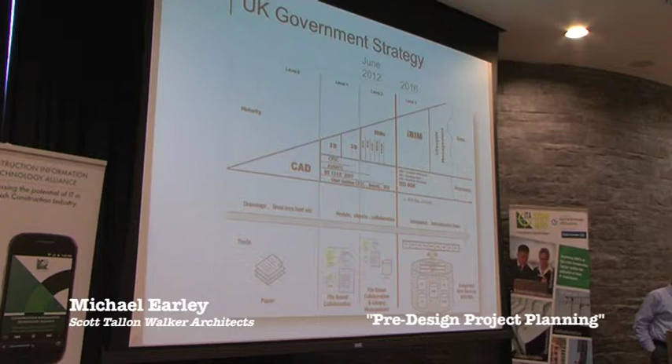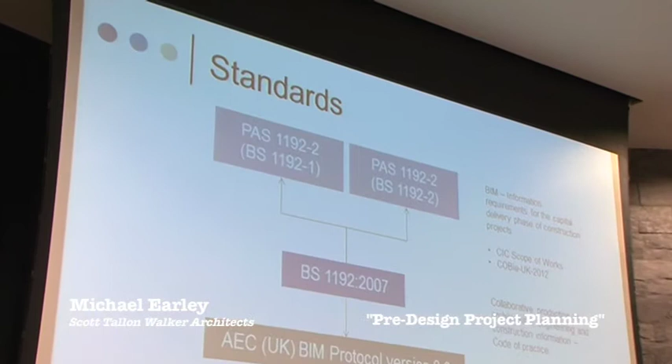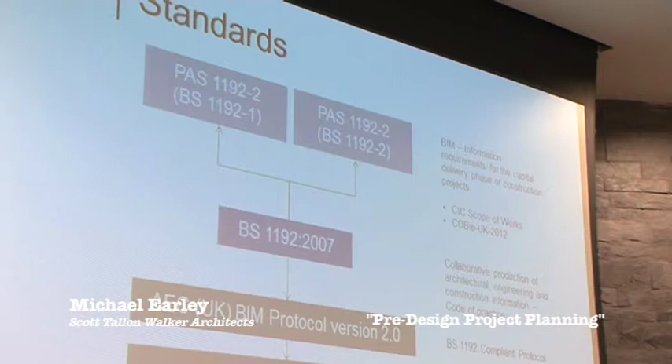Okay, I'm going to go back to where the standards came from, so I can give you some idea of how we came up with the RIAI template BIM Execution Plan. It's still in a draft format, but the essence of it starts off from BS 1192:2007. That was a British standard, set up basically for collaborative production of architectural, engineering and construction information, and it's a code of practice.

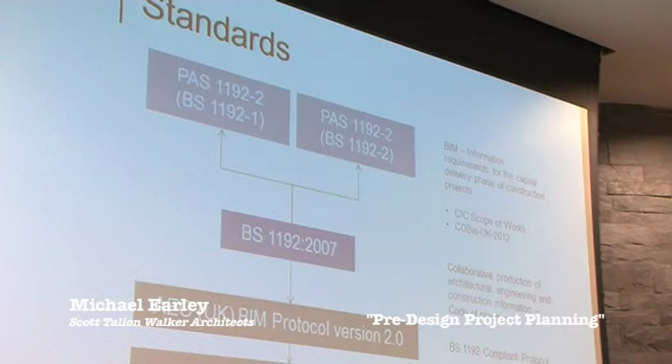It doesn't necessarily have to do with BIM, it's to do with basically how to name files in construction, how to share them, and one of the important aspects of it is the way that it shares them. And this has been used now in sharing models. There's 4 stages: there's work in progress, shared, published, and archive. And it gives a very clear definition of how fit for purpose a BIM model is.

There's 2 documents being worked on at the moment. I only have access to one, which is the PAS 1192. PAS stands for Publicly Available Specification. Ultimately, that will become BS 1192, probably this year, I would suspect, and there'll be another one then, which is another version. The first one's to do with basically delivery of projects, and the second one will be to do with sort of operations and maintenance and portfolio and asset management. So very much for the UK government basically to look at maintaining the assets that they have.

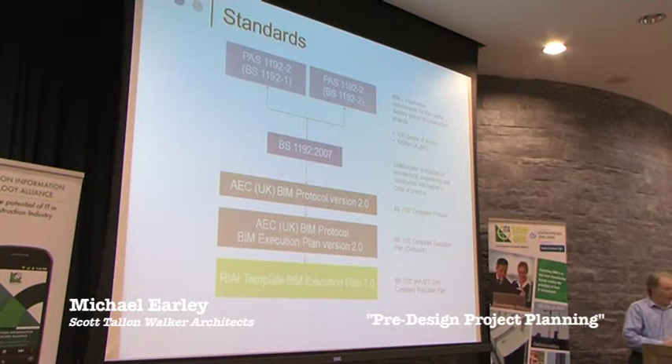Also, what came out of BS 1192 was the AEC UK BIM Protocol, version 2. Version 2 was brought out in September, and they also brought out a BIM Execution Plan. It's not so much a BIM Execution Plan, it's kind of a guidance on how to write a BIM Execution Plan. But it's actually very good. We used it then as the actual template to generate the RIAI template BIM Execution Plan, and we gave it a little bit of an Irish flavour.

When we started off, I suppose I thought, would we produce the BIM protocol itself again? The BIM protocol is quite a beefy document. It uses BS 1192 as the basis, but says exactly how you do it, as if you were doing the project in-house, where you put your files, how to name them. It's actually excellent guidance.

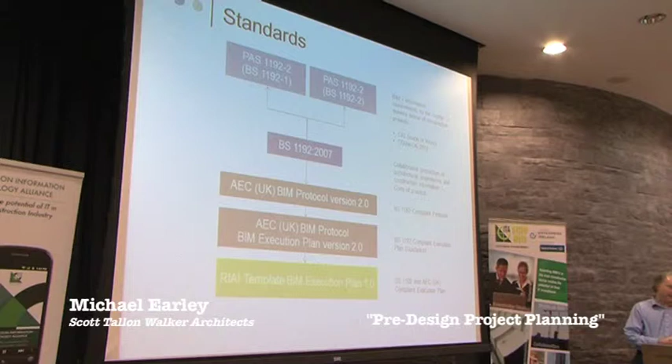The execution plan, just to make it clear, the execution plan itself is how the team works together. So it is, I suppose, the lowest common denominator of how the actual project team, when I say the project team, I'm talking about the structural engineers, mechanical engineers, it could be planners, architects, everyone basically who is involved in it. And it sets out basically the lowest common denominator for everyone. And it's a document, certainly at design stage, that would be agreed between everyone, that's the minimum standard that you'd work to.

Okay, so BS 1192, just a quick slide on that as to what it is, just in case people aren't familiar with it. It defines the common data environment. That's how you share model files. So how fit models are for purpose, naming of containers, which are basically folders and files, the suitability of models, drawings and documents, covers revision control. It also covers spatial coordination.

In our BIM Execution Plan, we've gone a little bit further on the spatial coordination and used the Ordnance Survey Ireland coordinate system, which is the ITM coordinate system, and gave a little bit more detail on that to make it more local to ourselves. And it covers quality management as well. It's a very good document, and certainly if you're doing a BIM project, it would certainly be there as one of your standards to recommend.

PAS 1192, which will become BS 1192, Section 2 and 3. Section 2 is to do with the information delivery cycle. As I said earlier, one of the things that the UK government, I know I keep going back to the UK, but they are ahead of us, and we have a bit of catching up to do. But Part 2 is to do with the information delivery cycle, and basically what the UK government want to get is this 20% reduction, not just through the use of BIM, but through improving the processes as well in the system,

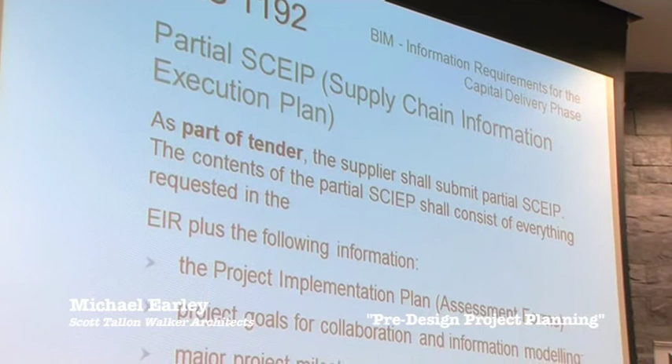The partial SCEIP, as I said, that'll be part of the tender. So each supplier, whether it's someone supplying architectural or engineering, or it could be supplying counters or whatever to the project, will need to produce an SCEIP, a partial one initially as part of the tender. And there's certain specific information on that. Basically, it's got to include all the requirements of the EIR, the Employer's Information Requirements document, and also some other information in addition to that.

Post-contract, then, you'll have to produce the final SCEIP. And the final SCEIP, as I said, is looking for a lot of information, but if we can standardise our response to that in this document, an execution plan, where the majority of the work will be done, it'll be a huge resource, I think, to everyone.

So there's a whole list of information. I won't go through it at the moment, but you can see things like drawing sheet templates, layer naming conventions if they're going to be used, what file naming you're going to use on the project, how information is going to be approved. It's going to be quite detailed. Exchange formats, project collaboration, EDMS, where you're going to store the documents, and then you'll also have the master information delivery plan as well, and any agreed construction tolerances for all disciplines. So they're going to be looking for a lot of information.

Okay, just a quick overview on the roles, because what they're doing is standardising roles and also documents. The employer's representative is probably a reasonably familiar sort of role at the moment. That is the person, it could be the actual client, or it could be someone that the client assigns as an expert, to make sure that the work is done in accordance with their requirements. There'll be a technical advisor to them, they've identified that.

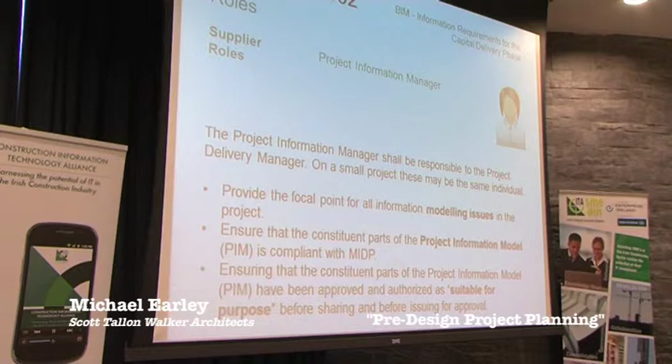There's a project information manager. This is akin to what I'll show you shortly as the BIM Coordinator. This is the person who's the expert on BIM, and their focal point is information modelling issues, managing the BIM model.

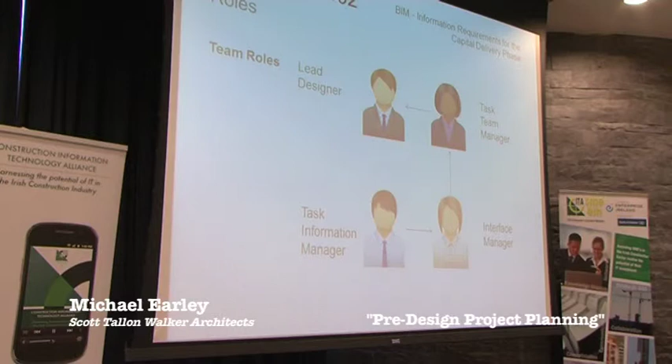There are a few other roles: lead designers, task team managers, and so on. You can look through the PAS document and see their roles and responsibilities. On a very large project these could all be individuals, but they could also be the same person.

The lead designer is the person responsible for design. One thing not to get confused about is the lead designer is responsible for coordinated delivery of all design information, whereas the BIM coordinator or project information manager is dealing with BIM alone, making sure information gets delivered on time and in the right format. There are all these other team roles you can have a look at on the slide.

The Master Information Delivery Plan is kind of an overall document. This includes BIM, includes information about the milestones for the project, it includes everything. It's basically like a master plan for the project, and it needs to be maintained by someone on the supply side, design team, or construction team.

The project information model is what they refer to as the actual BIM model, or a PIM document. Some of these terms may be subject to change since the document is a draft, but they call the BIM model the project information model. It should be progressively developed and delivered to the employer, so they're clearly looking for the BIM model through a series of information exchanges. It'll be developed in accordance with the Master Information Delivery Plan, and consist of graphical data and non-graphical data documents.

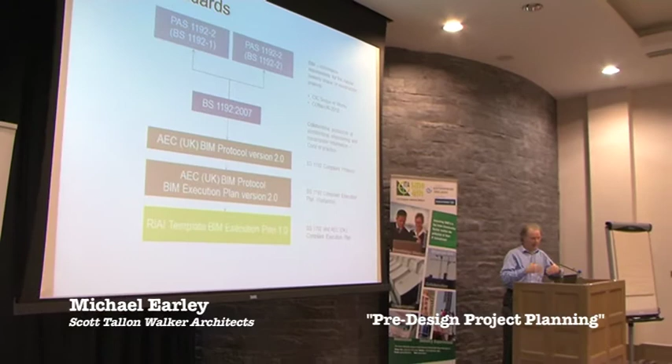We thought it's so good that we could use it nearly as it is and extend it to make our own template BIM execution plan. The one thing I was concerned about was there's a lot of good guidance, but when you sit down to a meeting managing a BIM project, you need something you can say, look, here's how we're going to do the project, not just that this is good guidance and you should do it this way. You need something that says this is exactly how we'll do it, and can we all agree that we'll do it that way?

Be very explicit about the things you're sharing. Often you don't really want to know behind the scenes how they store it on the server, or if they back it up - you just want to know you can rely on the data coming in good time. All you need to know is the name of the file, where we're going to store it, who's responsible for sending it out, how it's validated, what quality I can expect from the model, and what quality is expected when handing it over to someone else.

So very sort of practical things. Okay, so just a quick note on the AEC UK BIM protocols.

There's two main ones at the moment, the AEC UK BIM Protocol and the AEC UK BIM Protocol Project BIM Execution Plan. The BIM Protocol is a very meaty document, very good document. The execution plan is really guidance on how to write an execution plan, and that is what we based our execution plan on, that guidance.

They also have sub-documents as well. They have a version of the BIM Protocol for Autodesk Revit, for Bentley. They're going to do one for ArchiCAD and also one for Vectorworks in version 2. There is a version 1 for all those 4 systems, but they're still working on version 2 for ArchiCAD and Vectorworks. So you're getting this flavour for each platform, and it's a very good format in the sense that in the middle is the main standards, irrespective of platform, and then you get the very specifics for each platform after that.

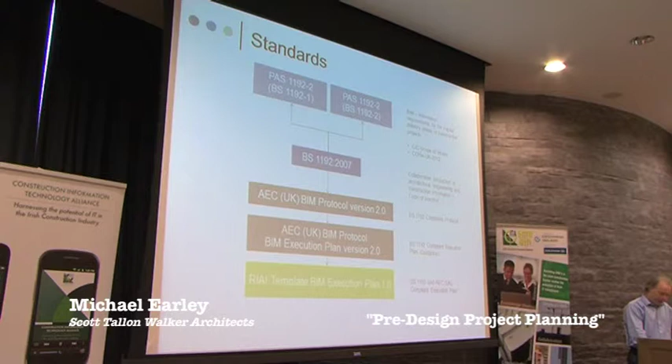So moving on to the BIM Execution Plan, which is derived from the AEC UK version. It was set up basically through a group which I'm involved in, which is the RIAI BIM Committee, and we have 6 main sections, and the section that deals with the execution plan is the good practice section. There's a little bit of interrelation between them and also between other committees in the RIAI.

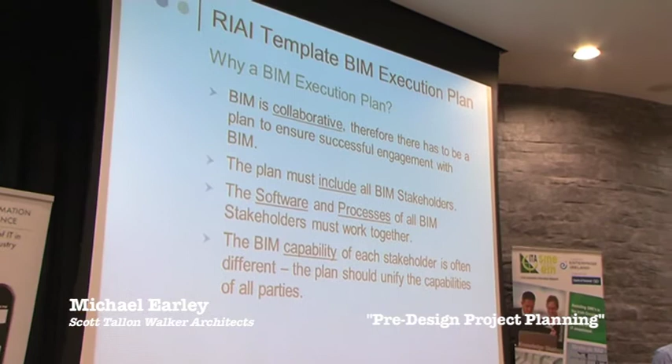So why an execution plan? BIM is collaborative, therefore there needs to be a plan to ensure successful engagement with BIM. We need to plan. In the old days, I suppose, we kind of did things because we all knew that was the way you did it, and it often didn't always work out as well as it should. In hindsight, you'd say, look, if we planned that, it would have worked out better.

But in BIM, it is complex, there's no doubt about that. But planned well, it will deliver time and cost savings.

The plan must include all BIM stakeholders. That's very important. And even though the document at the moment is the RIAI BIM Execution Plan, we knew we had to get off the blocks, and no one else was coming to the table on it. And we thought, look, the architects probably just need to get this out, we need to get something together, so that it'll drive discussion, if nothing else at least.

So the software and processes of all BIM stakeholders must work together. It's not just software, it is the process. It's very important that we're all working together, doing the same thing and reducing redundancy of effort.

So the BIM capability of each stakeholder is often different. That's going to be the case for another 2 or 3 years anyway. Every time you get a team together, there's always going to be one who's hardly used BIM at all, someone who's done 38 projects in BIM, and everyone else somewhere in between. So the plan needs to unify the capabilities of all parties.

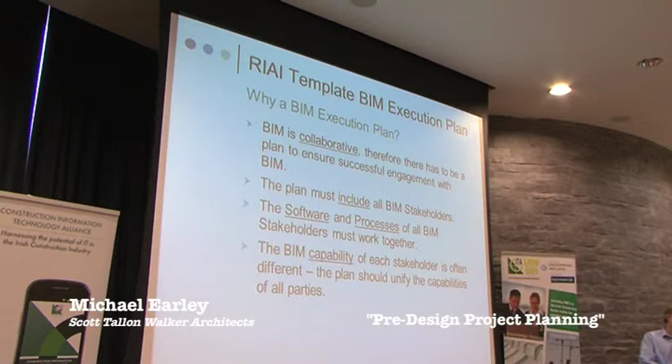So it's divided into 5 main sections. First is introduction, project information, objectives and goals, collaborative working, which is kind of the meat of the document really, and then the project resources and IT, and then there's a number of appendices which are very important.

The introduction has a few sections. It's fairly straightforward stuff. Organisation agreement is the last section, which is very important. Everyone's got to agree to the document, that they'll work to the standards in that document.

Section 2 then sets out things like the project details, the scope and so on. Unique project challenges - what's different about this project? It identifies who is the BIM coordinator, the key objectives of the stakeholders, and then it defines exactly what the BIM coordinator does and the BIM manager does in very explicit detail, what their role is. Not just that there is one, but exactly what they do.

The BIM coordinator is one per project, responsible for the BIM Execution Plan, this is a summary obviously. They will basically take, hopefully, the execution plan, the RIAI one for the moment, take it as a template and tailor it for the project. They'll be responsible for the BIM coordination program, so they're responsible for making sure that the BIM milestones match the actual project milestones.

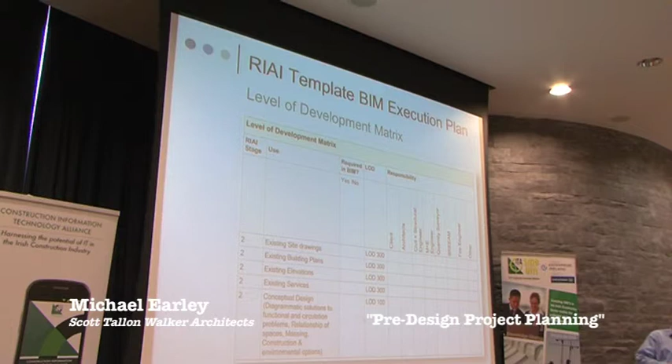Section 3 then goes through the project objectives and goals. I'm just conscious of time. The level of development matrix is an important document - it's an appendix in the actual document, and what it does is set out the level of detail in the model, because you want to make sure that you don't have door handles on the drawings when you're doing the outline schematic drawings for the building, or the 3Ds for the building. So there's got to be an agreed level of detail, and we've done our best to resolve that through 5 levels. 3 of them are to do with design, and 2 are to do with construction - one is to do with construction, and one is to do with the handover of the model, or the one that will become the facilities management model at the end of the day.

The process we've set down for this is that you first establish that BIM will be utilised for a particular use. If it's not, you don't really need to answer the rest of the questions. If BIM will be used, you select a level of development appropriate for that use. So if you're doing something later on in the project, it'll have a higher level of development. Something earlier on will have a lower level of development. Identify the organisations responsible for leading and coordinating each use. The way we see it is, someone leads, someone coordinates, and someone potentially reviews - there's always one lead, that has to be the case. So then you identify the organisations that coordinate the model, and then finally identify all those who review and comment on the outputs from the model.

So the levels of detail are 5. The first one is conceptual design. The second one is similar to schematic design. The third one is where the model elements are suitable for generation of construction documents and shop drawings. 400 then is a contractor level stage - this level of development is considered suitable for fabrication and assembly. And the last one is as-constructed, suitable for maintenance and operations of the facility. So it's 5 very discrete levels of development.

Just a note on spatial coordination. In the document, the execution plan, we've used the Ordnance Survey Ireland ITM coordinates, setting out items like survey point, base point, units of measurement, grids, true north - very much defining what everyone will need to get the project done from a spatial coordination point of view.